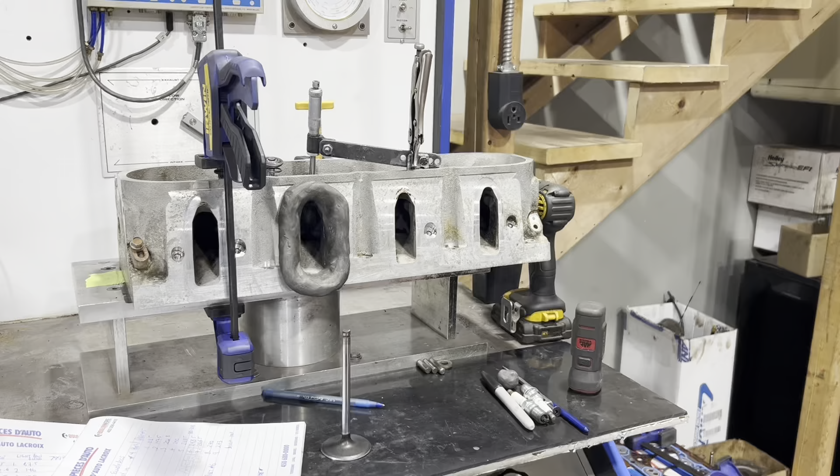Continuation on how to improve your LS cylinder heads, cathedral port. This is part 6. Technically I should stop right now because if you watched the first video, I said I wanted to get around 270 CFM, and I'm already past that for the build we're doing.

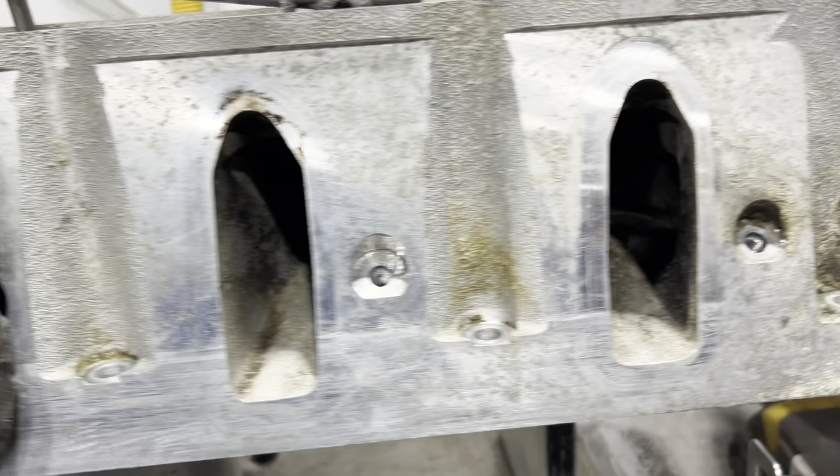With minor work, like if you watch the video, I fixed that ridge on the seat into the throat, then removed the bump right there, then narrowed down the guide a bit and blended everything in the bowl area. Very simple stuff that you guys can do at home.

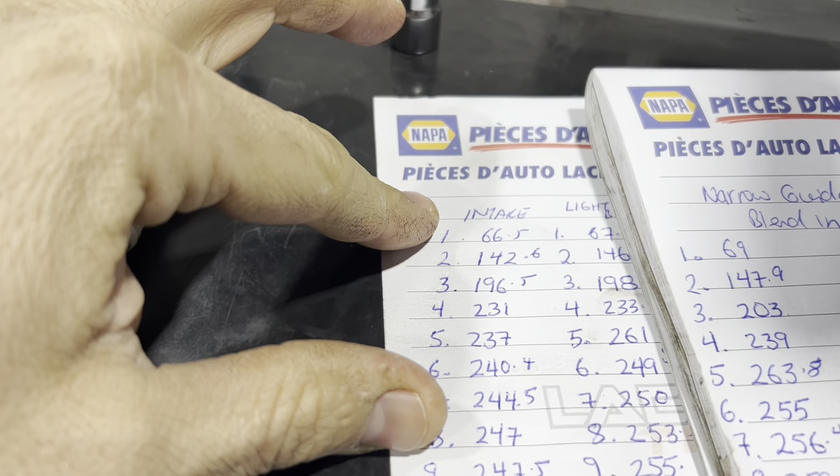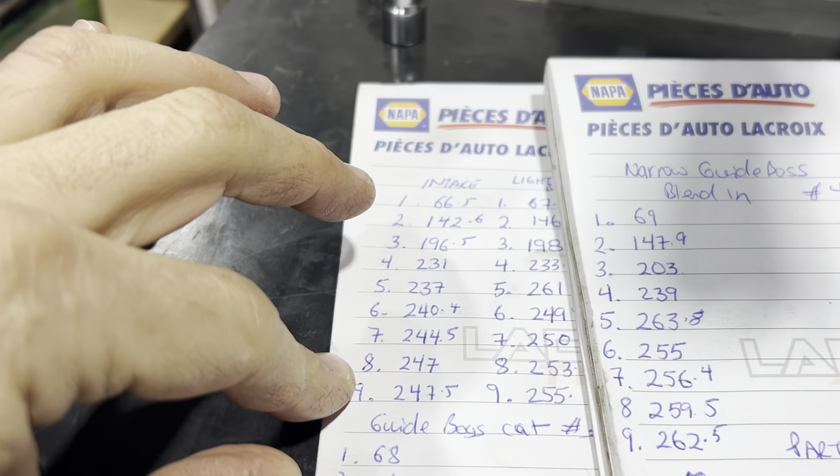If you see the initial stock port, these were the numbers: it was going around 240 at 6, 247 at maximum lift. Then at part 5 it's going 268.5 at 5, 273 at 550, then it tapers out with a peak of 273.

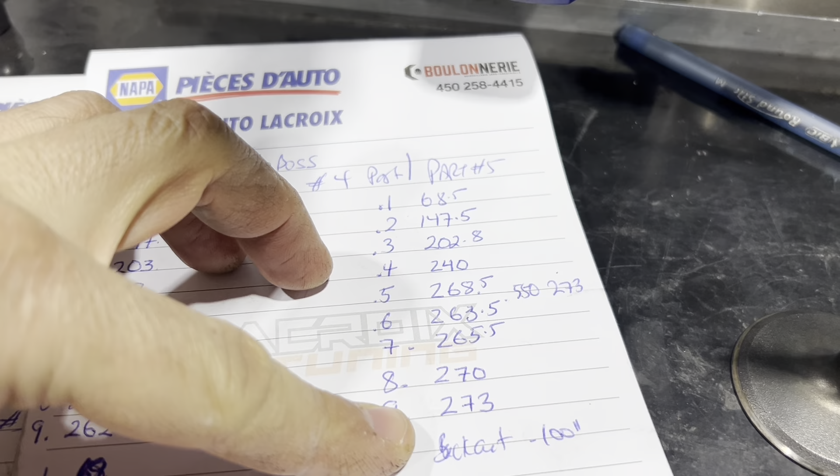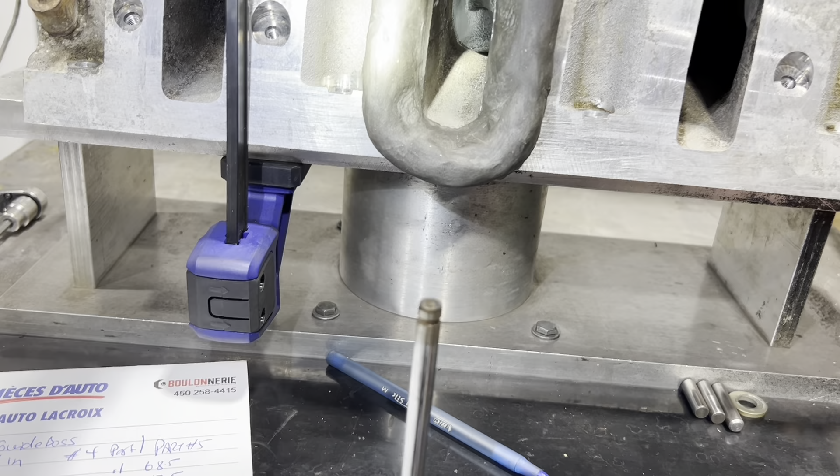And what I'm gonna do today, I don't think we're gonna gain by working the chamber, to be honest. Actually, this chamber is for a 5.3 also.

So yes, what I'm gonna do is open it for a 4-inch bore, since we are gonna install this on a 6-liter. I am not gonna do a full porting on the chamber and blend everything and make everything shiny. Like I said, minimal work for the maximum gains. It doesn't have to look pretty to work. That's what people don't understand.

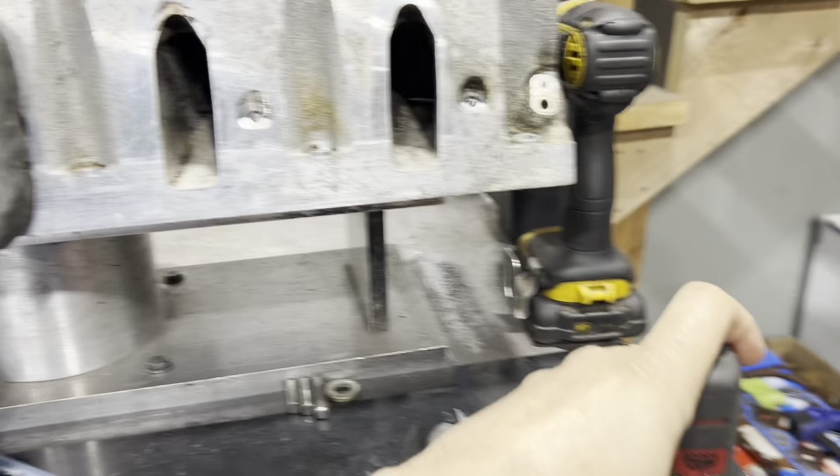Look at this port right here, nothing pretty about it. It's stock, with the exception of the bump removed, narrowed down the guide a bit, blend the short a bit. That's it. And the head is already going 270 plus, right?

So I'm just gonna do a little bit more work, unshroud the intake valve, matching it to a 4-inch bore, and then we're gonna put the head on the bench again and try to see what it does. And maybe for part 7...

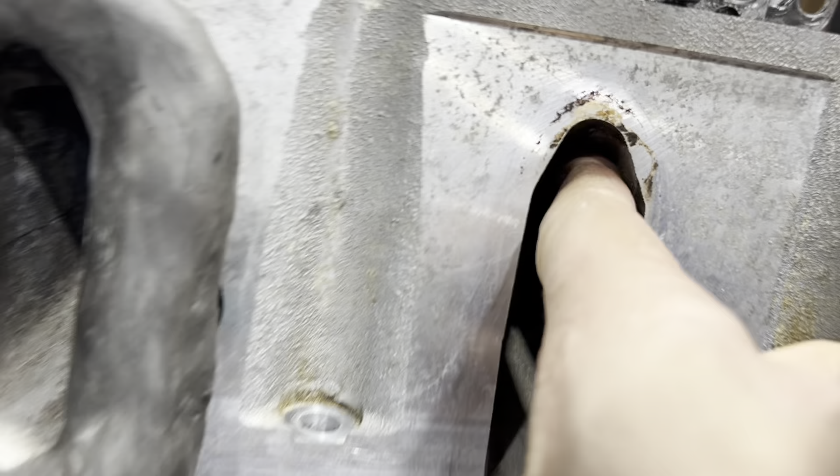You see how there's an abrupt transition, like right here. Maybe just blend this part into the roof. It goes here, then it's abrupt a bit. Just blend that and see what happens.

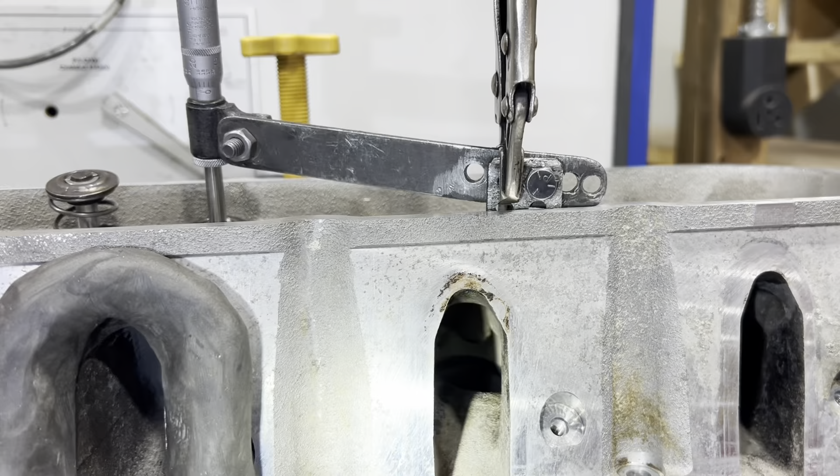So we're gonna do part 6, let's try to see what we can get out of the chamber work. Then we'll make another video just doing a little bit of blending over here, minor. All right guys, I'll pull off the head, do some grinding, and then show you guys the results afterwards. I might even show you the steps, what I'm doing exactly, okay?

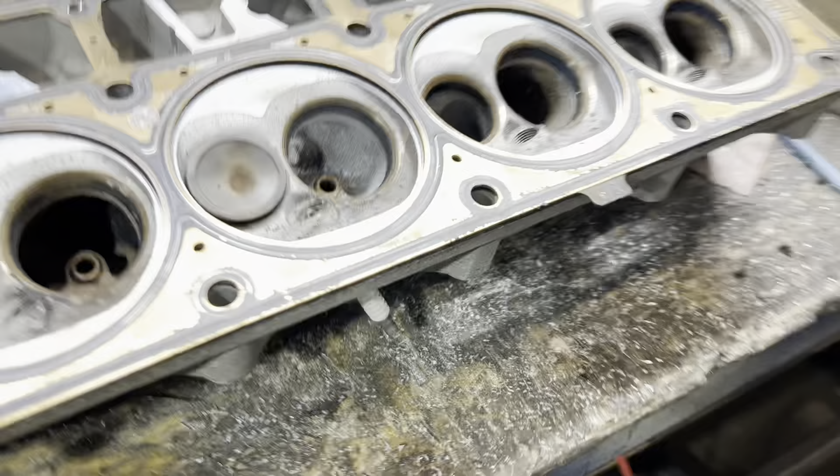All right guys, so I pulled the head off the bench, took a 6.0 head gasket, matched the dowel pins here, and I like to use just a pen and scrape it all around. So now if I remove the gasket, you see how much I could open it, which I'm not going to open the whole thing because I'm just going to make the chamber bigger. I just want to unshroud the valve.

You want to maybe work this area here, okay? The exhaust will be done after, there's going to be another episode on the exhaust. I'm just going to blend this part, and round off the section of the spark plug here, and then we'll put it back on the bench.

All right guys, so pretty much I opened it up over here to match with the gasket. I rounded off the bump here on the spark plug and just sanded it quick. Not that I did any work here, just cleaned it up a little bit. Now we're gonna put it back on the bench and see what difference this change made. All right, let me clean it up, put it on the bench.

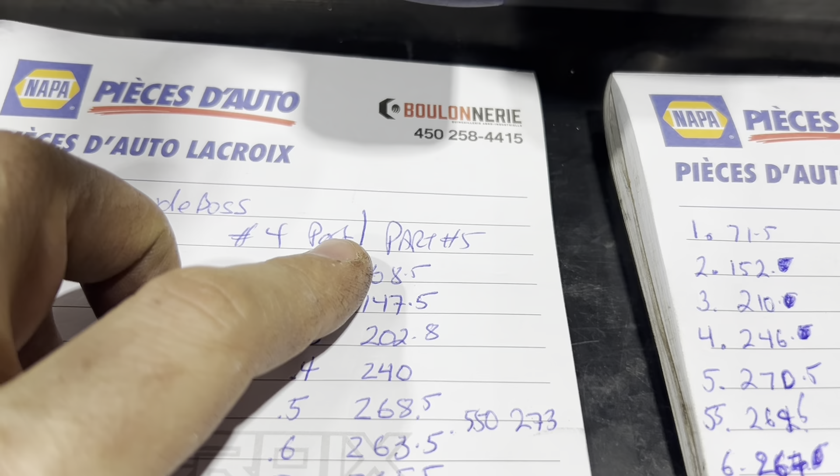Okay guys, continuing here, I showed you in the video the minor work that I did to unshroud the intake valve, and around the spark plug boss I rounded off, and the gains were pretty good, very good actually. If we compare the last test, which were already up by a lot from the beginning, with minor work, I'm repeating, minor work.

For those just watching this, I've already gotten this cylinder head to flow 310 CFM many years ago with a stock valve, and with the 317 head and a 205 valve, flowed 325-330 CFM. So this is not an all-out max porting job. This is me showing you little things you could do to your cylinder head that can improve it substantially.

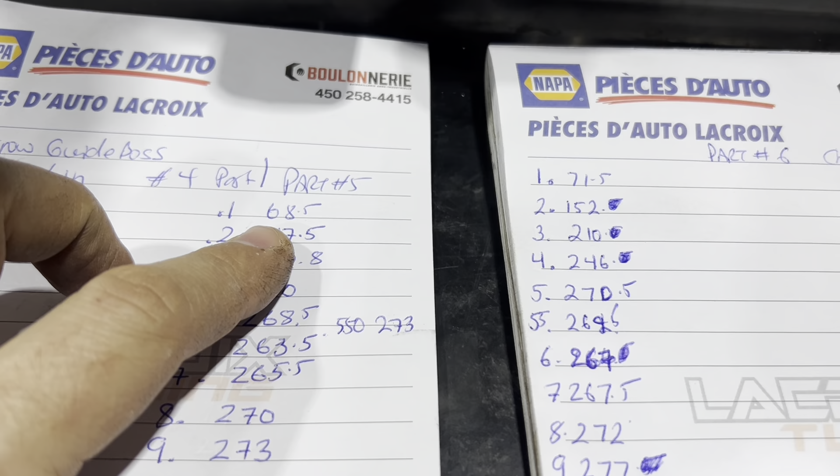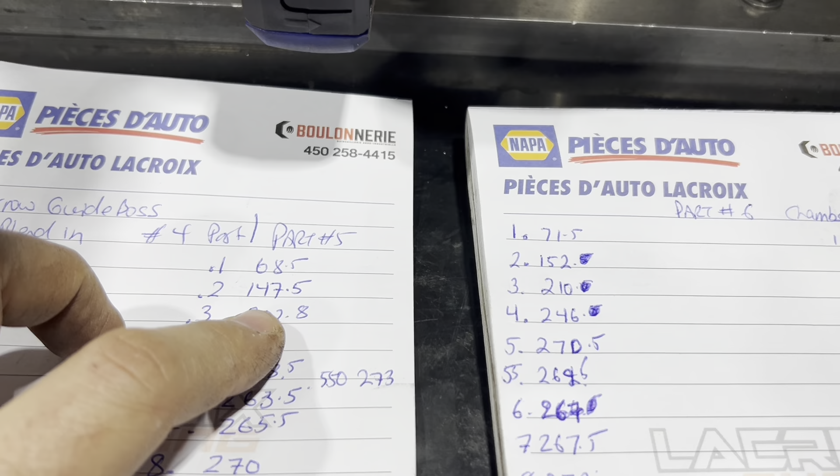So we're at part six, and watch the gains. 68.5 from the last time we touched the head. We're up to 71.5, 147.5. We gained almost 5 CFM at 3. Not bad for the cylinder head, it's really good. Look at these numbers, they're amazing.

Look at the port, it has not been touched, has not been shined up, hasn't been polished. That's the favorite word of the internet, polish. Even some guys that port cylinder heads and do videos say 'oh, I could have done a better finish.' It doesn't change anything. You can make it look like a mirror and you'll probably lose horsepower. You know what I mean? It does not make a difference. Look at the port.

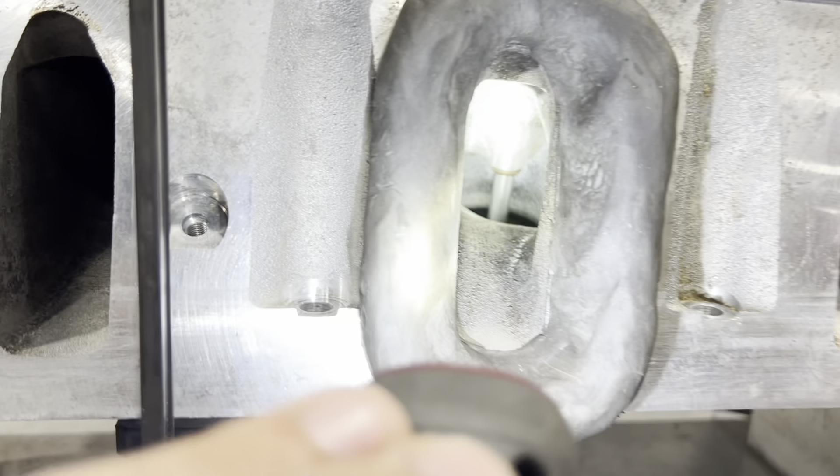Okay, it's rough, I didn't even bother. I could do it so much smoother with my grinder. It would look better than a CNC machine if I really wanted to - that's how good my hand is. I can make a port look like it will make a CNC machine look bad if I really wanted to do cosmetic work. That's not what makes power, you know what I mean?

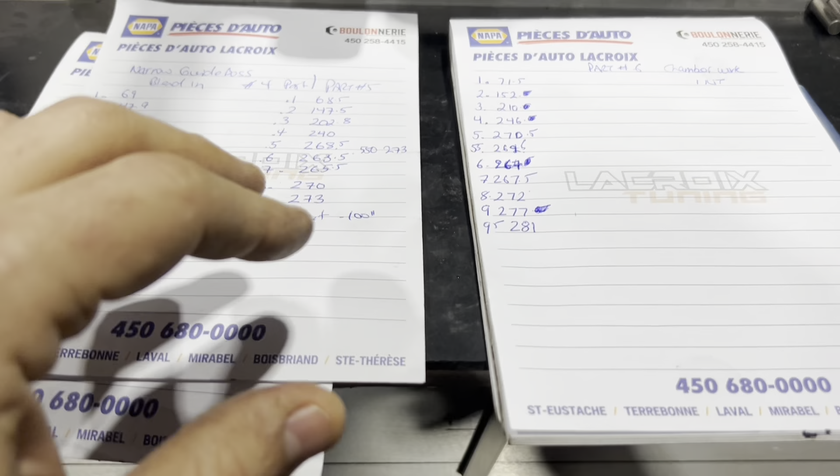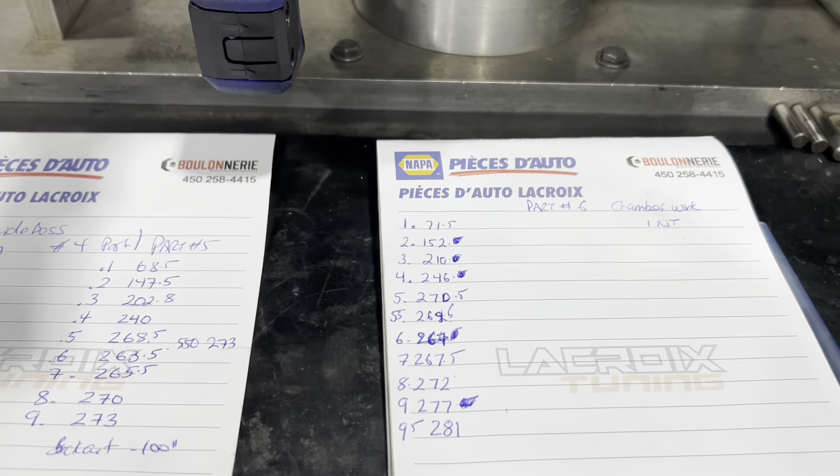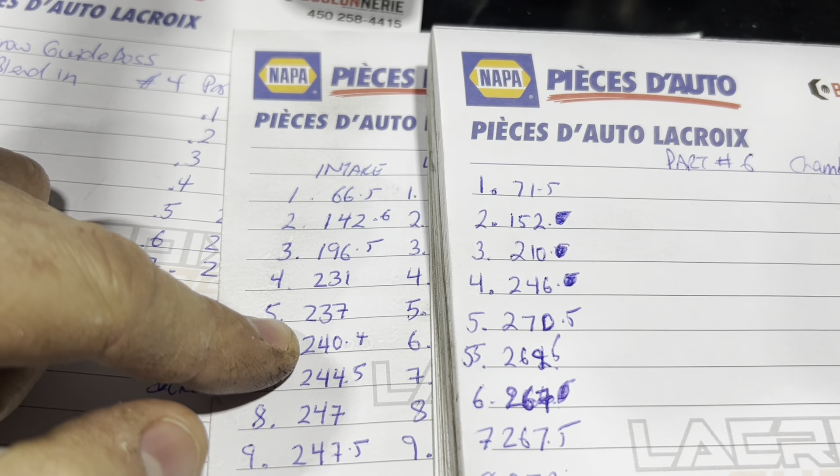Look, 6 steps of 2 minutes of work each. Look at the numbers, okay? The head goes 281 at peak. It goes 270.5 at 5. So if we go back and compare to the first one, this is the original port before we touched it. We're up by 5, up by 10, up by 14, up by 15. Look at this gain at 5.

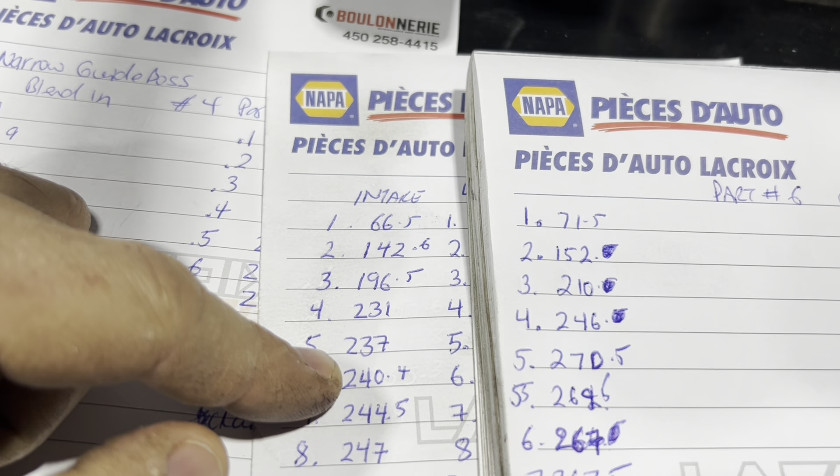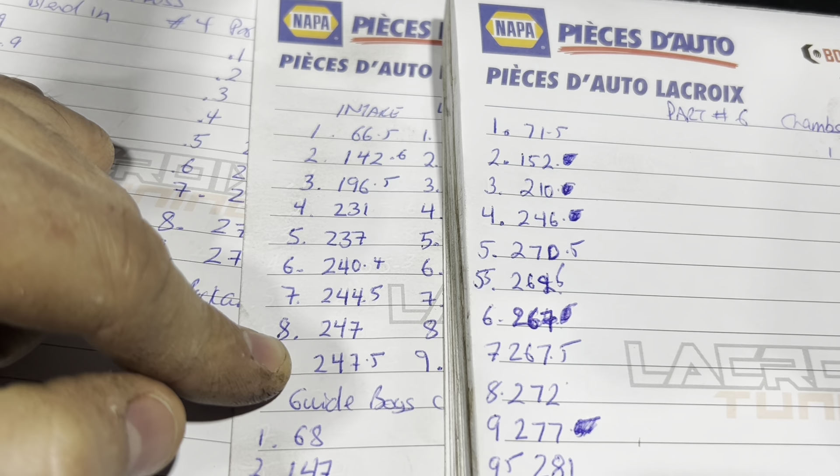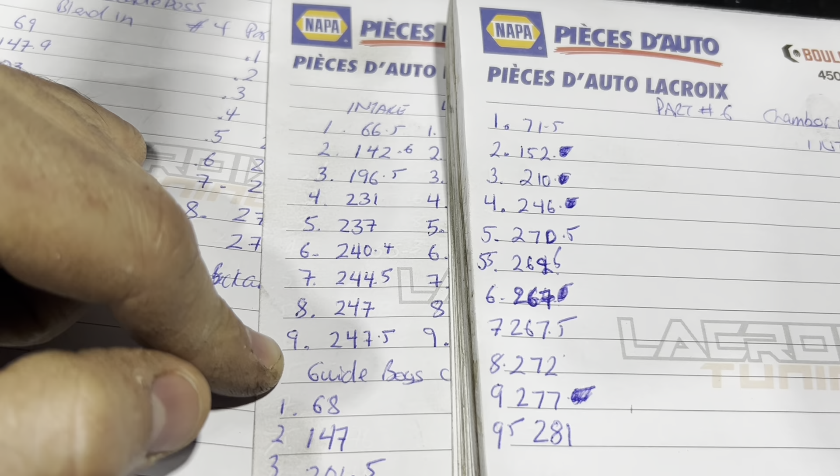343 CFM - no, 33 CFM, 33 and a half CFM at 5. We're up 22 and a half at 6. We're up 23 CFM at 7. We're up 20, no more than that, 25 CFM at 8. And at 9, let's say, because I never opened it up all the way down initially, so we're only going to go to 9 - we're up by 30 CFM at 9.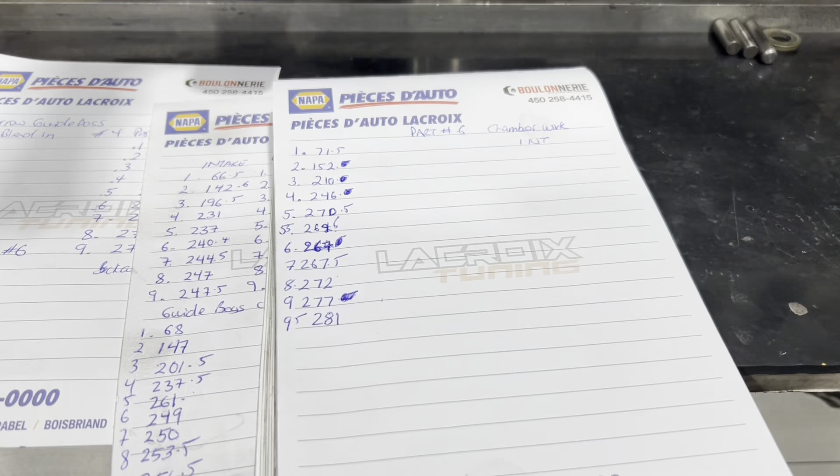6 minor steps without touching the port. I haven't touched the port, I haven't opened the port, I haven't done nothing to the port - even the bowl area. If we talk percentages, I don't even think I've opened it 0.5%, to be honest.

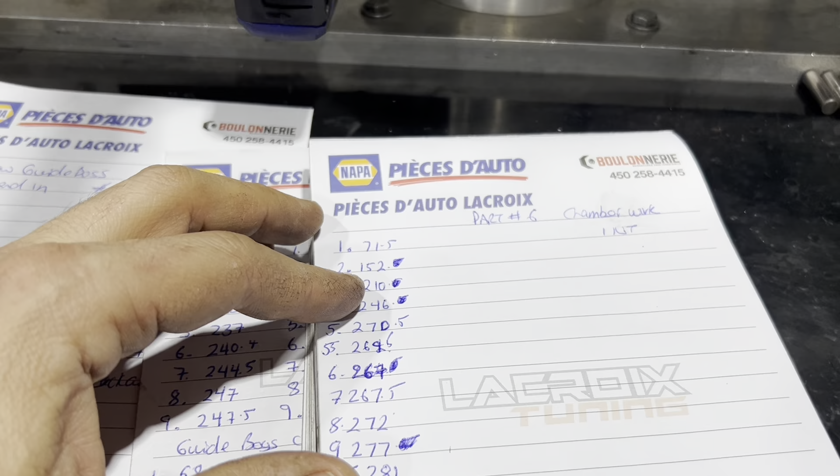So I'm happy with these numbers. Just for the sake of the videos, I might just do one more step. But for what I wanted to do, to make 550 horsepower with this cylinder head, it would do that and beyond with these numbers. Even though it drops here, the moment you install the intake manifold, all this changes.

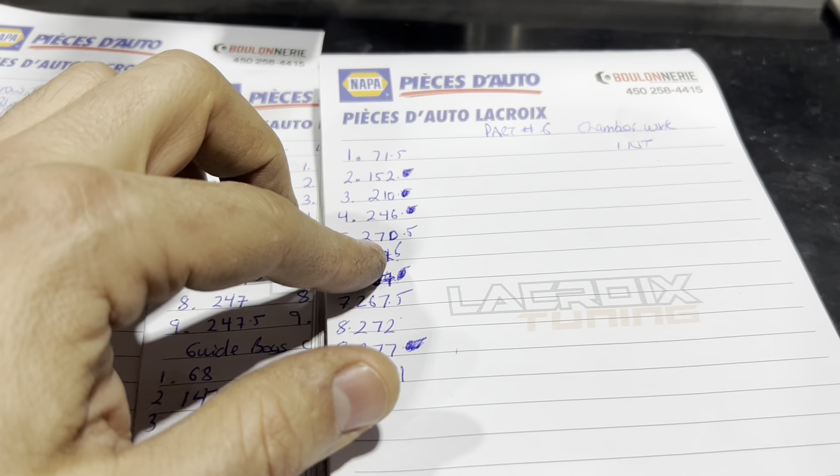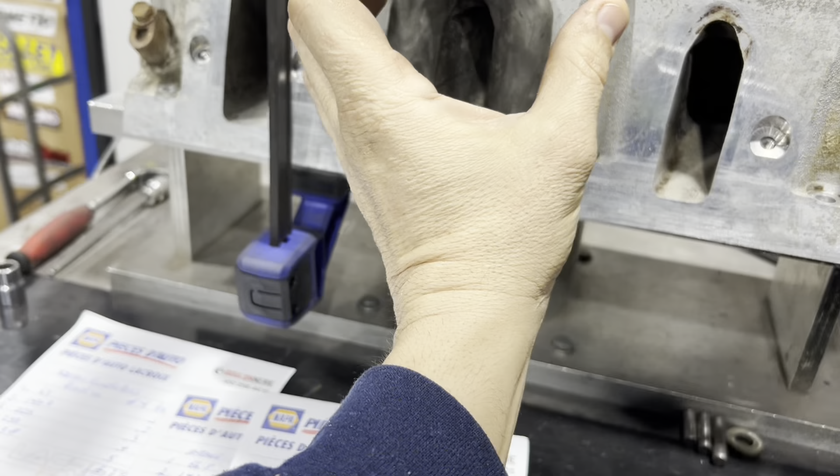With the intake manifold on, you'll start dropping at 50 to 100 lift higher, because it creates - let's say if I had an entry that will go out another 3-4 inches, it will go backwards probably at 7-8 instead of 5-6. So with the intake manifold on, it won't back out like this. Now somebody's gonna say, how do you know? Test it, I've done it already - I've done it with small block Fords. It still does this issue, but it'll go higher on the lift.

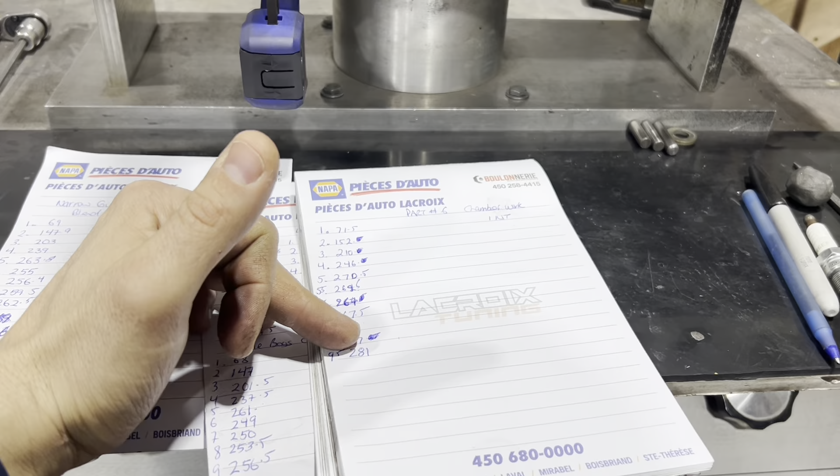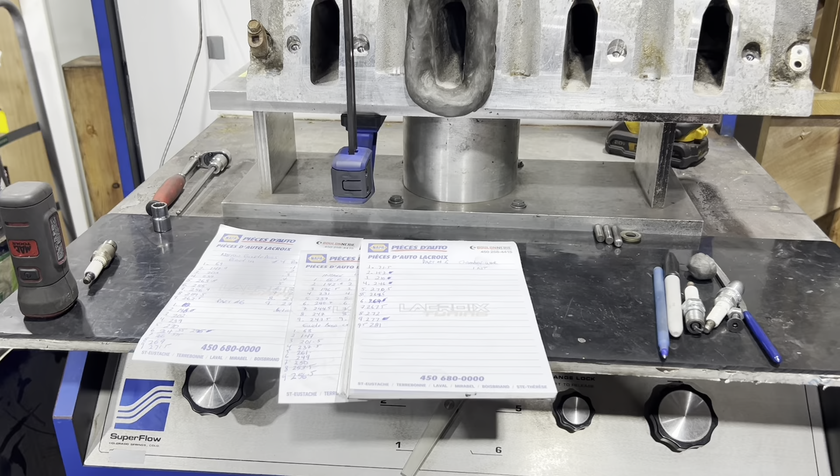So George, MGR Performance, that was a little chamber work. I think I'm gonna pull the head out and put out part 7, and it will probably be the last one, because like I said previously, I wanted to show you guys some minor work that you can do at home to improve by 30-40 horsepower. This cylinder head will make 30-40 horsepower more than a stock one on the proper application.

I mean, if you put it on a 5.3 with a 218 duration cam, you probably won't see a difference, maybe 10 horsepower, you know what I mean? But if you put this on 11-to-1 compression, 10.5-to-1 compression, 600 lift cam, a decent amount of duration, proper intake, and all that, this cylinder head will make 25-30 horsepower probably in a 6-liter, and maybe it can make up to 40 plus horsepower, 50 on a stroker. So for the amount of work, it's amazing.

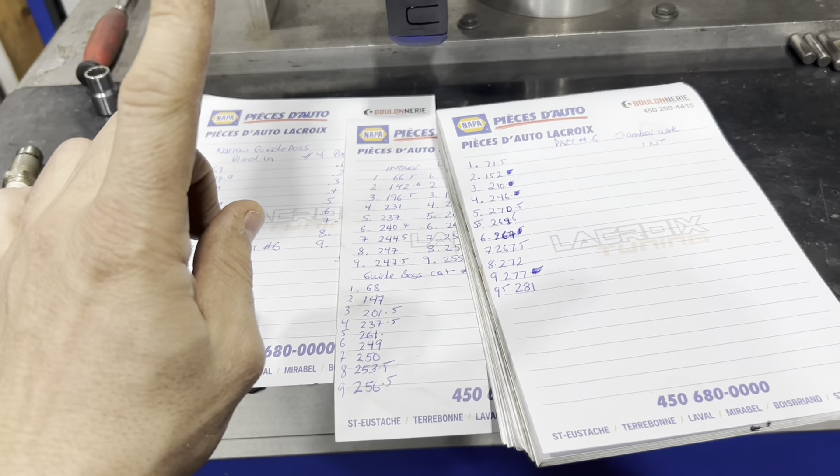Every step, for those that want to know, have I even lost 1 CFM at any step I've done? This is what experience is about. So when somebody talks to you and gives their opinion, pay attention not to words, but to actions. You know what I mean? I just showed you guys 6 different steps. Not one time at any increment of a lift have I even lost 1 CFM.

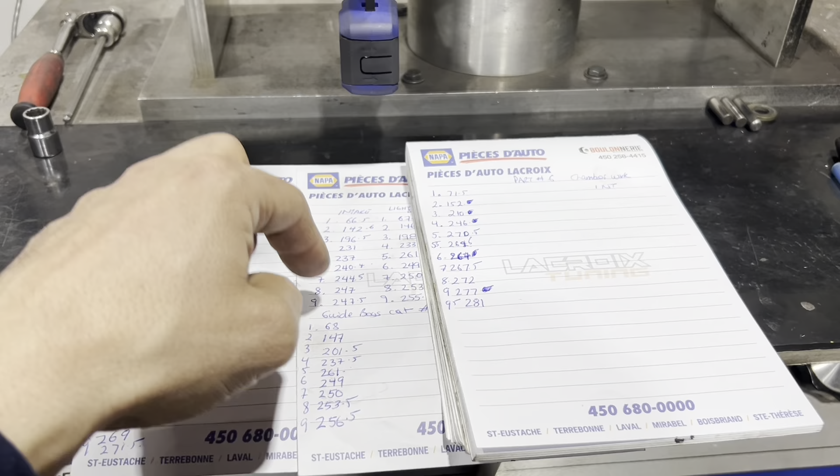Same bench, same port. The machine is dead cold because it's freezing here in Canada. It's cold. I come in, I just plug it in, and I test my head. When the motors get warmer, it actually picks up flow.

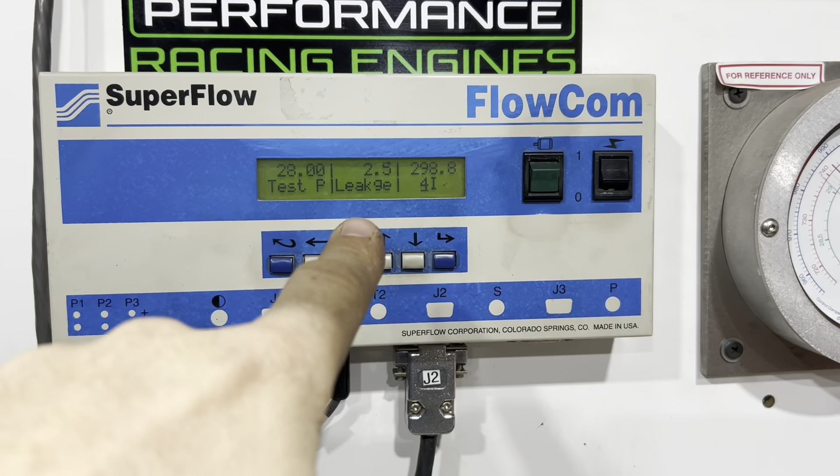2.5 CFM leakage. I did my leak down test. So if I didn't have that 2.5 leakage - some people don't even check that - it would have been like 284 CFM without even touching the port. I'm repeating, I have not touched the port. This is not max effort porting. This is years of experience that I'm giving you guys, showing where to touch and what to do to improve your cylinder head with minimal work.

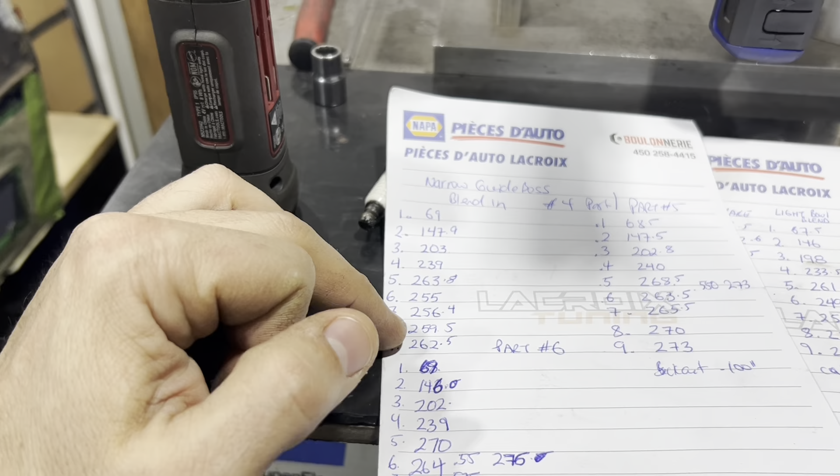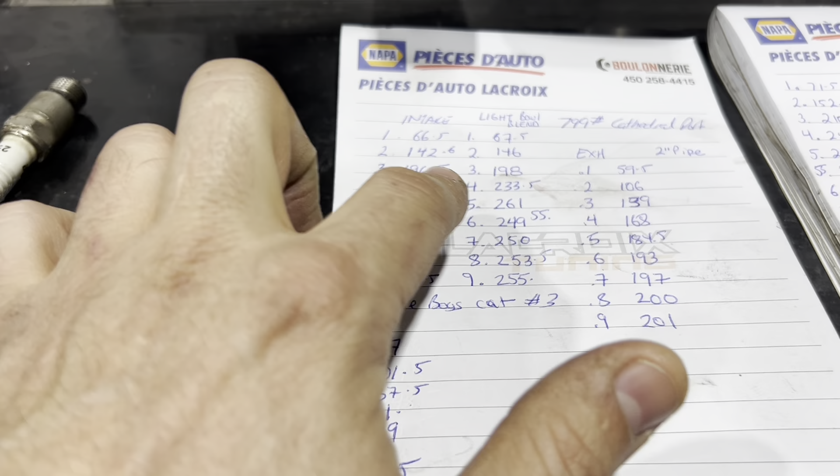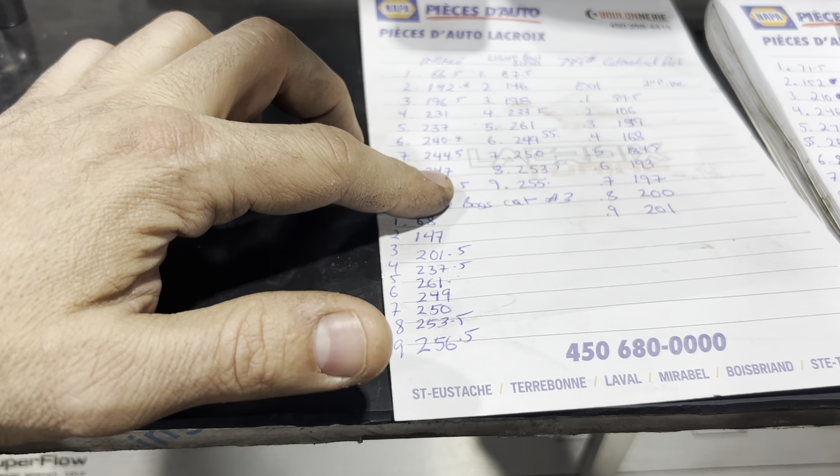We started from here, let's go over it. That was the initial test. Then it was the ridge on the seat - gains. We brought it to like 255. Then I removed, not a guide boss, I removed the guide boss. Gains everywhere, it went to 261.

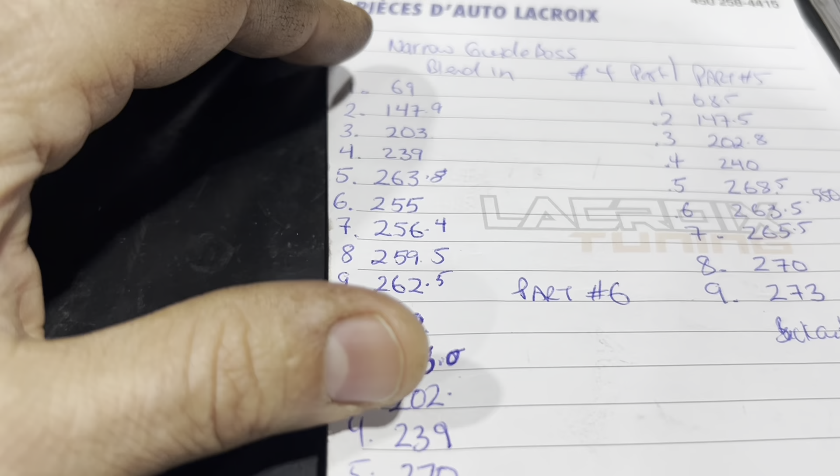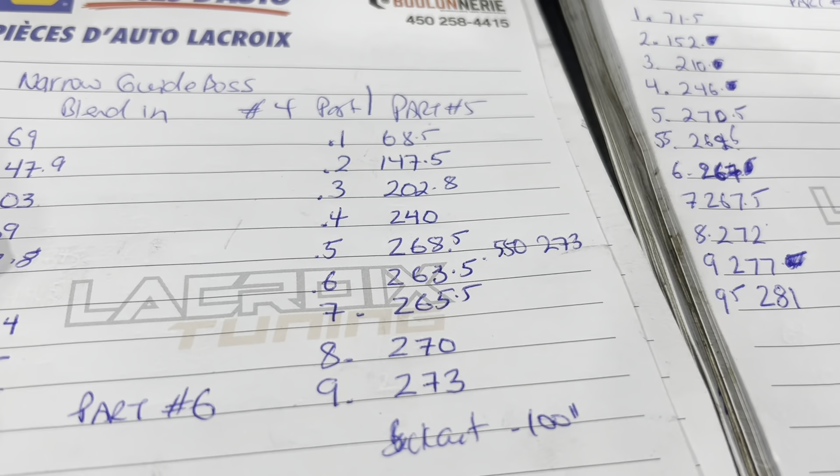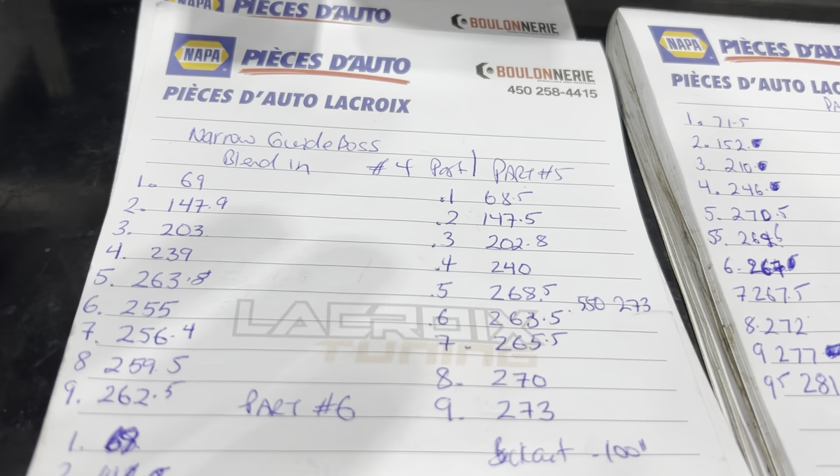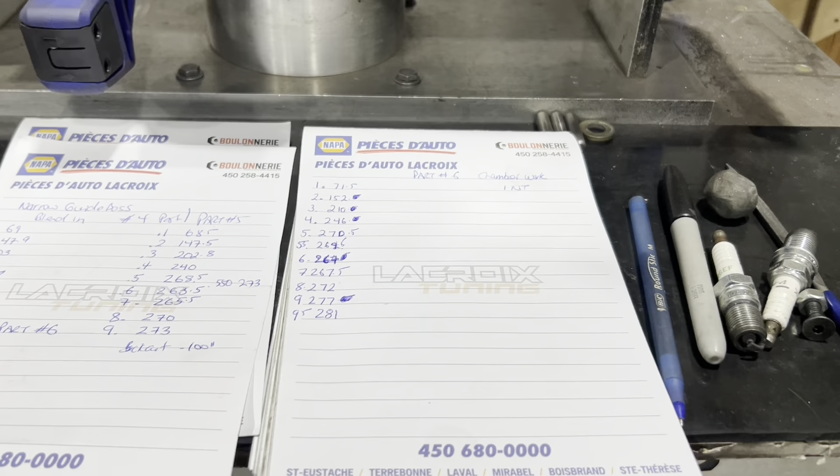Then we narrowed the guide and did a bowl blend - gains everywhere, 262. Then we blended the short turn and blended everything nicely without opening anything. It went to 273 at 550. But every increment from the beginning to the end, that's when you know you're doing something right. When it's pretty much gaining everywhere, or not losing but maintaining and gaining in some areas, that's when you know you're going the right direction, okay?

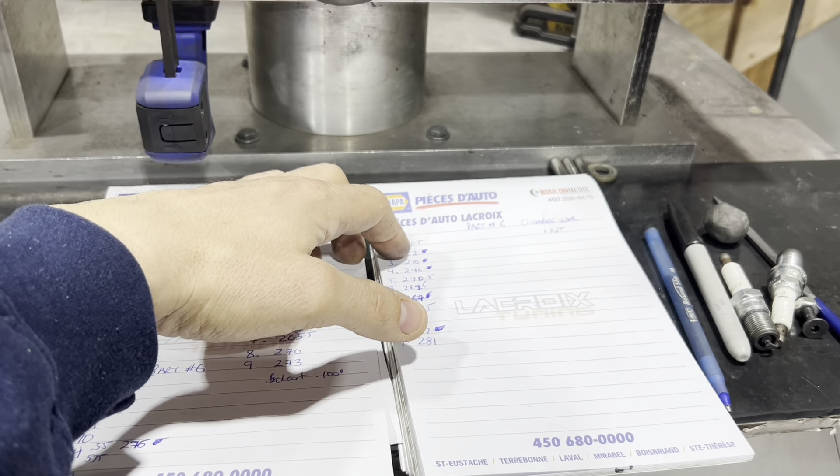But then again, when you do all-out porting, sometimes you have to sacrifice a little low lift for high lift. If you have a 700-800 lift cam, you really don't care what happens between 100 and 300. Actually in some cases it's better to have a little less flow at the bottom, you know what I mean? If you have a big cam and racing engine, that's when you go steeper valve jobs and bigger percentages and throats, and it gets complicated. Keep it simple, you can never lose.

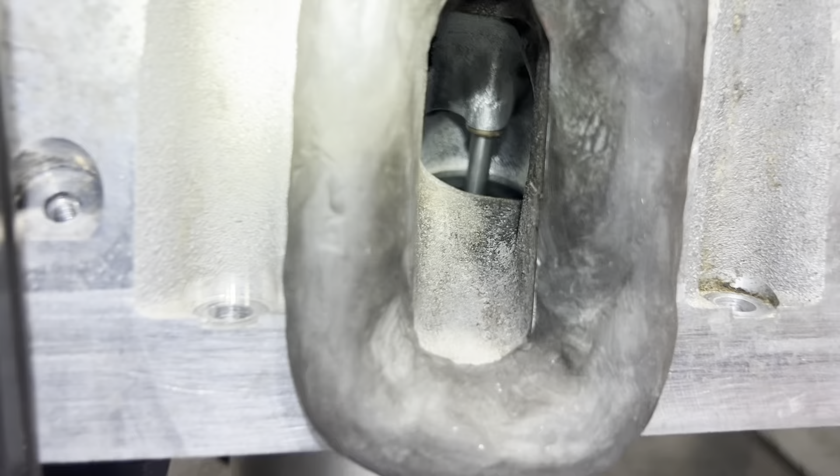Forget about shining your ports, you're just wasting your time. Look, we've gained 40 CFM in some areas. And look at the port - if I were to give this to a client like this and tell him this head will make 550 to 600 horsepower, he'll say this guy is a crook because he doesn't know any better. But if you take a head that somebody touched in the wrong areas, the head is no good, yet it's all shined up and looks nice - oh my God, this guy did an amazing job. That's the problem. Looks is not everything.